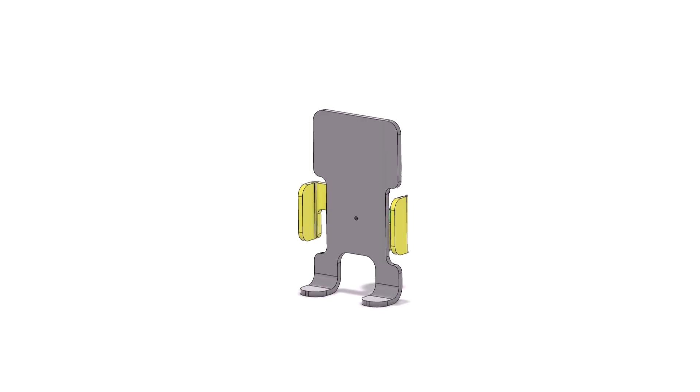Hi, my name is Franco Rotoli from the Solidworks training team. This is the second video in the xDesign for Beginners series where I'm modeling a phone holder. Today, we'll be modeling one of the holder arms.

Let's jump into xDesign and start modeling.

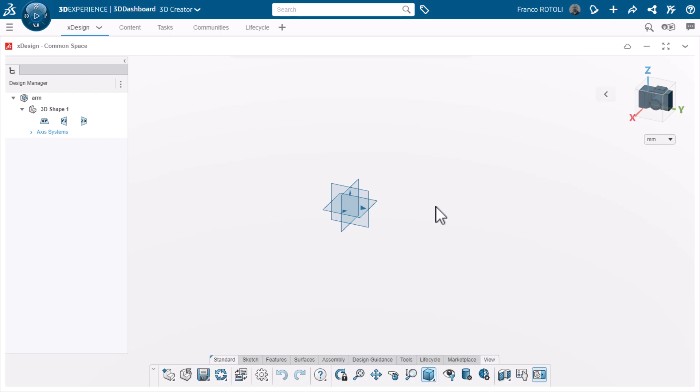From the xDesign main screen, I'll click New Component. I'll name it Arm and note the collaborative space to which it's saved. I'll show my standard planes from the View menu and choose the front or YZ plane, and start a sketch using the shortcut icon.

Since the arm is of a consistent thickness, I can get away with sketching an open profile, or just a series of lines that don't form a closed loop. I'll choose the line tool and sketch an L shape.

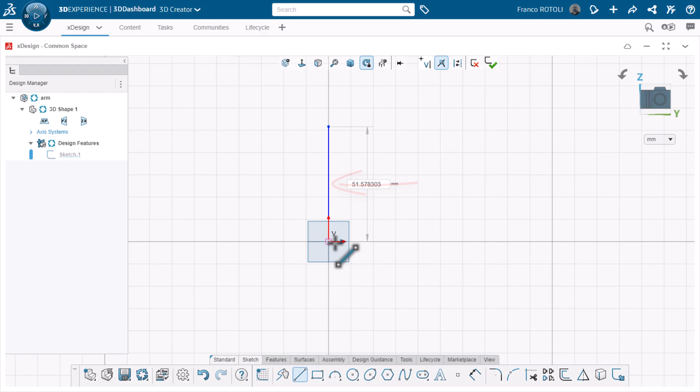Notice I'm being mindful of the blue inference lines so that it ties my lines to the origin. To stop the chain of lines, I just push Escape on my keyboard. I can also double-click the left mouse button to stop the chain.

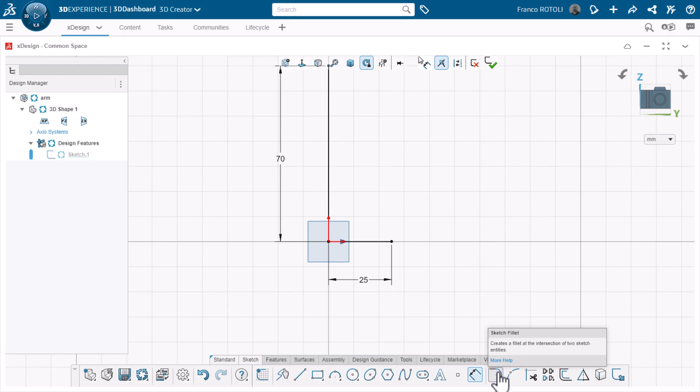Next, I'll add some dimensions to fully define and size my sketch. I'll also add a fillet within the sketch. Depending on the circumstances, sometimes it's easier to add a fillet in the sketch rather than in the 3D solid. My sketch is still fully defined, so I'm ready to extrude.

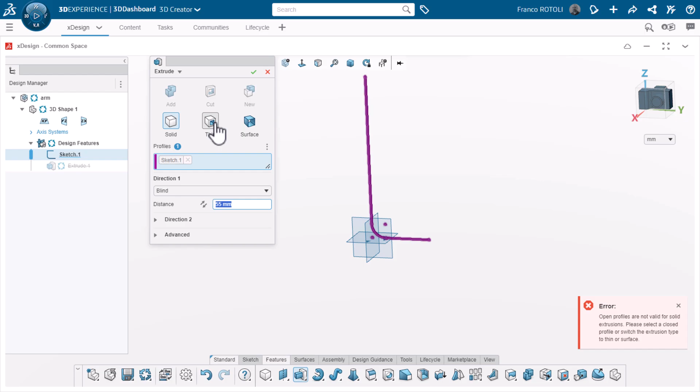Because my sketch is open, an error pops up in the corner, warning me about open profiles. It also offers a solution and suggests I close the profile or change the extrude type to thin or surface. I'll choose thin. Now the extrude dialog changes a little and gives me a box to type in a thickness.

This part will have a consistent thickness of 5mm. I'll change the direction 1 end condition to mid-plane so I keep my plane centered. Then I'll click the green check to accept.

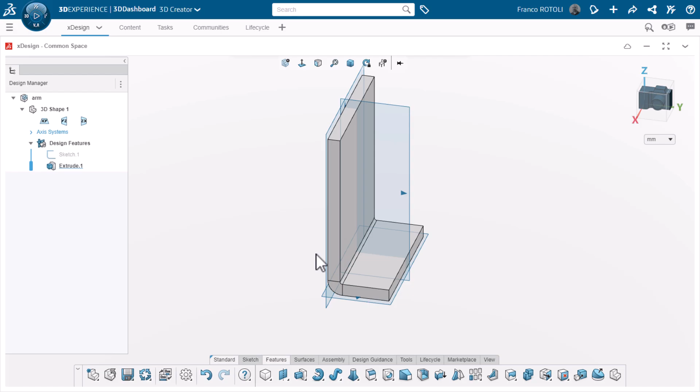Next, I'll choose this face and start another sketch to remove some material. I'll sketch a corner rectangle and dimension it. I'll also add another sketch fillet in the corner here.

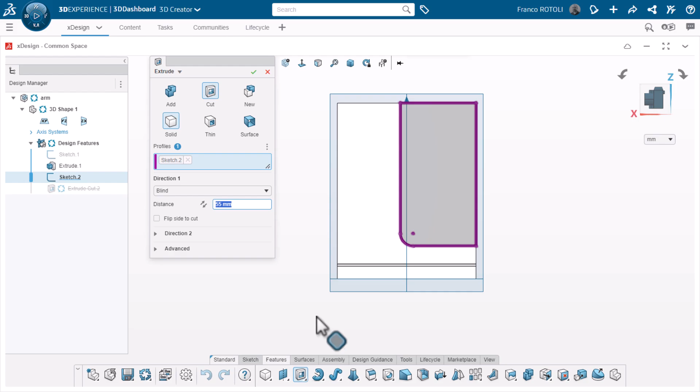This time, I'll choose Extrude Cut from the action bar. And because I want this cut to always go through the entire part, even if the thickness changes, I'll choose Through One Way as my end condition. Clicking the green check completes the command.

I'll add a fillet feature to this corner. I couldn't add this to the sketch because this corner didn't exist before the cut was made.

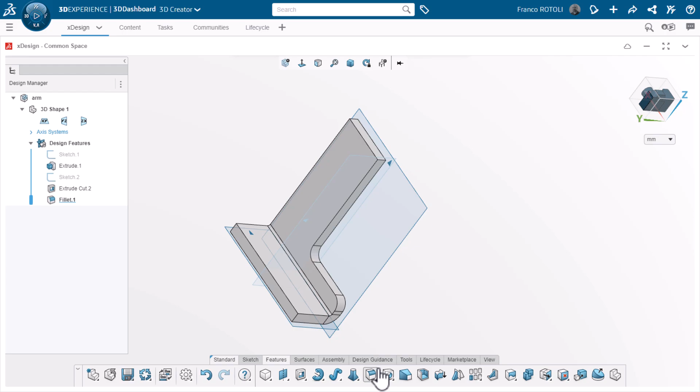For the top here, I want to round this completely off. I could do the math and figure out the radius for each corner, but what if the geometry changed? I'd have to go back and redefine the fillets. Luckily, the fillet command has a full round option. I don't have to think about any dimensions. I just select the 3 sides that are involved in the round, and xDesign does the math for me.

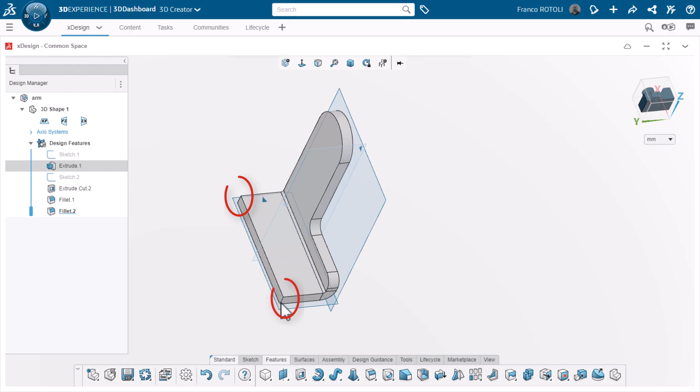Next, I'll round off these front corners as well. Notice the Design Assistant. I'll click it and it will suggest the other corner. This error is because full round fillet is still selected. I'll simply change it back to a constant fillet.

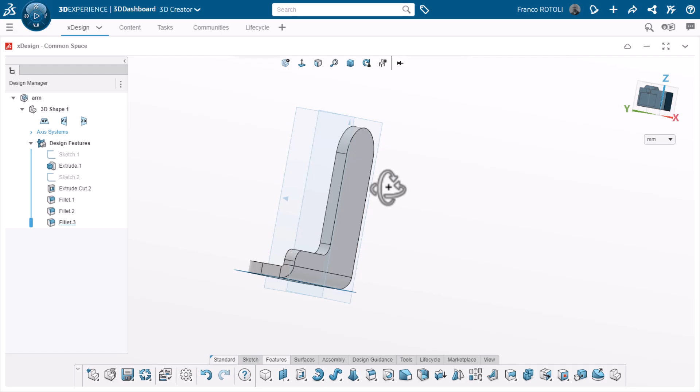The last feature I'm going to add is a round standoff on this face. This will engage with another component later. To make sure it stays centered on the face, I'll sketch a line.

When I hover over the circular edge of the fillet, notice a blue circle appears. Just like the blue inference lines, if I click the point in this circle, xDesign will create a relation and lock it to that point.

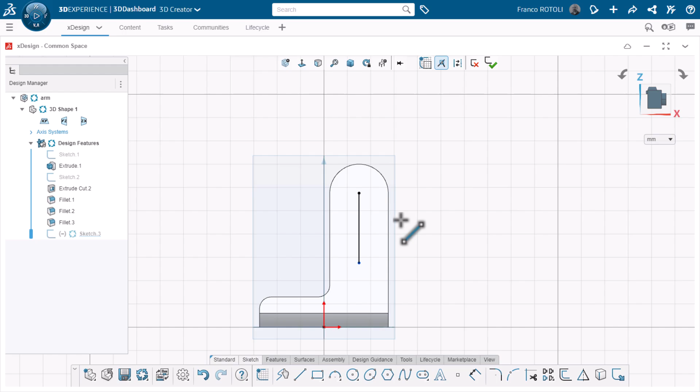One more thing on relations. Notice the V next to my cursor here. This is telling me that the line is vertical and will add a relation keeping it that way. This line is for reference only, so I have to make it a construction line. To do that, I'll simply select on the line and click this icon.

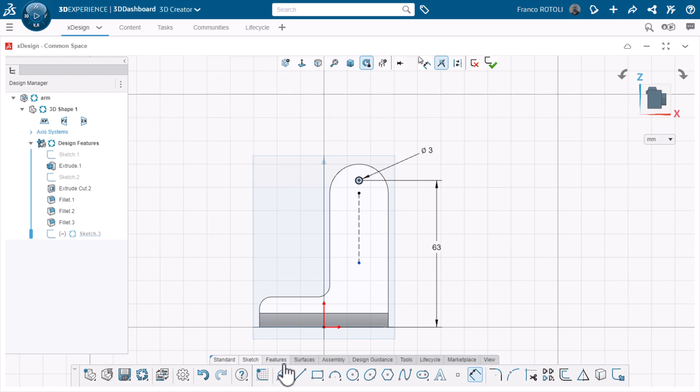I'll now sketch my circle on this line, watching for cursor feedback and sketch relations. Adding some dimensions to size the circle and locate it where it needs to be completes the sketch. Finally, I'll extrude this boss 5mm to complete the arm component.

I'll hide the planes to clean up a little and save the part.

Thanks for watching. In my next video, I'll design the back plate that holds the phone.